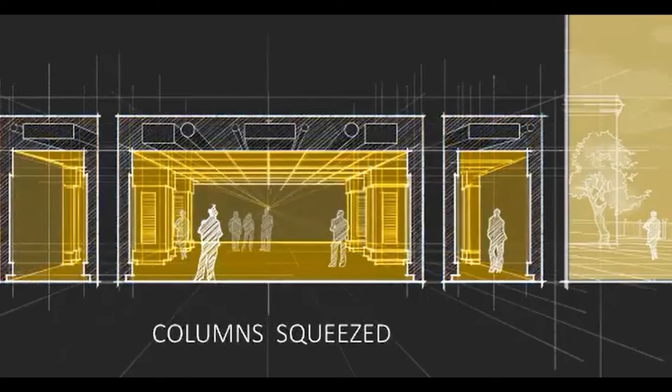I assume you've studied a bit about what architecture discipline is and what the studio does before attending this talk. But I will run you through briefly the foundation of the studio and our current works, and then move on to focusing on hospitality works as such.

I'm going to correct my introduction a bit. I believe while the term multidisciplinary studio is used a lot these days, design studios, architectural design studios, were always multidisciplinary. Even if you look at Corbusier's studio, you design multiple things - you go from cities to buildings to products to furniture and such, because if you had a point of view, you'd have a point of view on almost everything. Such studios never specialized in any one thing.

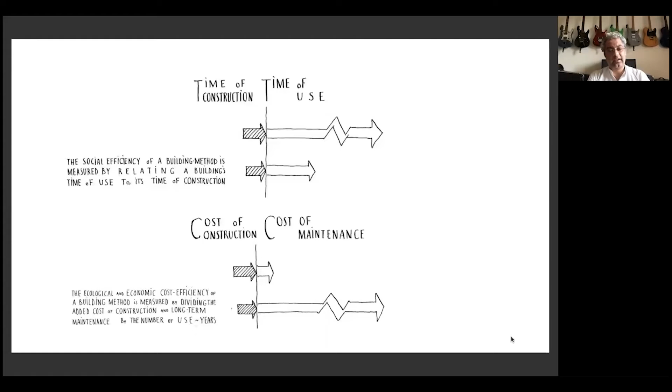If your project just sticks out like a sore thumb over 20, 30 years, it's not going to contribute to place. So the trick, while you do have to make a building which is a hoarding for itself, is often to source local, reduce manufacture, reduce transportation, and use materials with a high life cycle. If you work with the age-old formula of reduced construction time and prolonged use time, reduced cost of construction, and reduced cost of maintenance over time, you will have a physically successful project.

But that does not mean you don't search for contemporary forms of expression. A very good analogy for that is the Sagrada Familia - if you've studied it by Antonio Gaudi, what it was and what it has become in its new form, that's a good example. Another reference is the Tjibaou Cultural Center from Renzo Piano's building workshop in New Caledonia. If you haven't studied it, you should look it up - it's a great building.

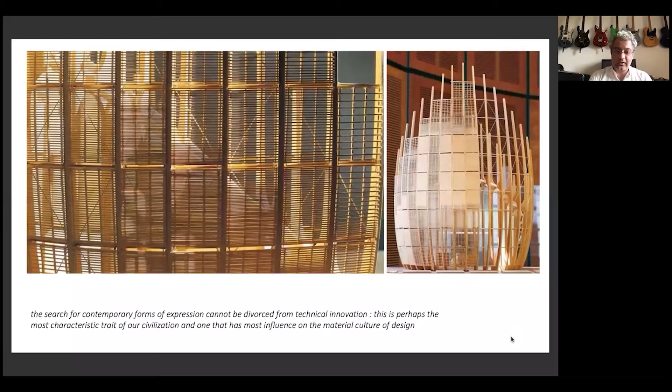Our first project was in 2003. This was not an architecture discipline project, but it was one of my first projects in hospitality - a small restaurant called Made in India at the Radisson.

Someone's mic is on.

This was the first time LED lights were used, way back - we'd got a local manufacturer to develop LED lighting for us. It wasn't even prevalent in the West when we did this, because it allowed color change, intense coloring, and fairly long-life light fixtures, and we had various references.

We realized through that it's important that you don't always interpret a client's values in the literal sense. That's what I mean about critical intimacy - while you learn and listen very closely to when a client is speaking, you must also be able to filter through it and contribute in a manner that is effective for the outcome of their project or business.

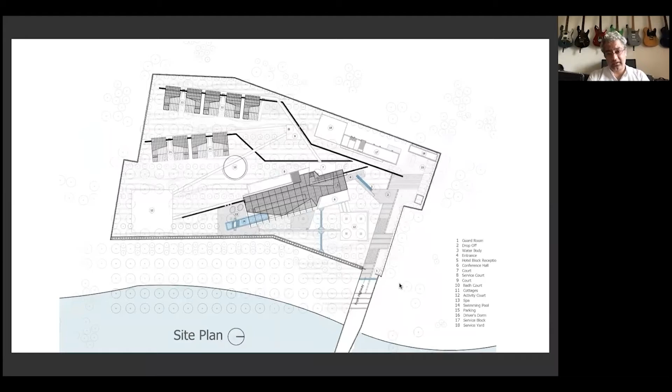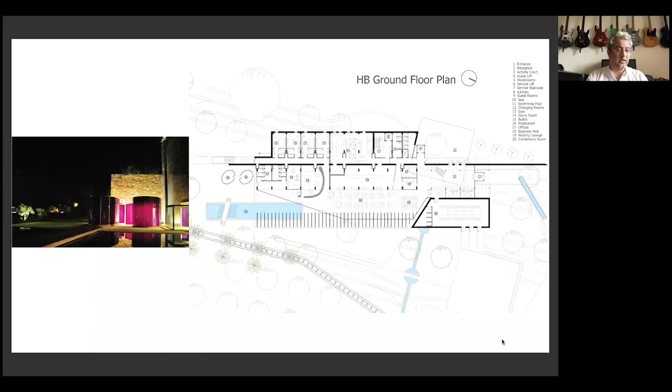This was the Ranakpur project. A lot has been written about it, but the project used a compositional grid, broke the compositional grid, and created a single large hotel building, but also a resort-like composition over about 7 acres of land, in a very programmatically complex space. So while people say hotels and hospitals are challenging because they're programmatically complex, we feel there's enough liberty, or enough space, in any building program to create unique architectural expressions.

What the Ranakpur project does is use passive and active energy responses, as well as an overall response to context and materials found at the site. So barring the steel and glass, all the stone you see was mined at the site, and a lot of what is called quarry rubbish - material that comes out with stone chips - has been used to actually create the building.

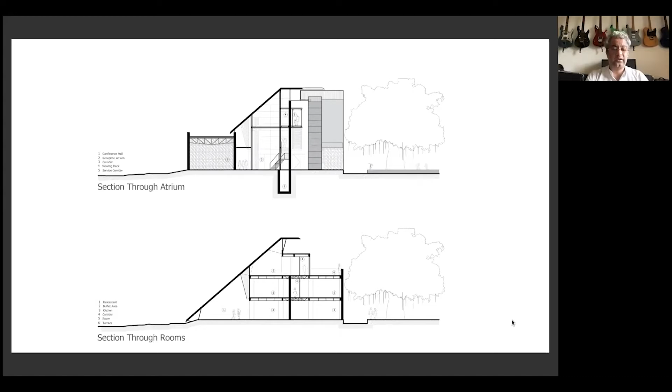A lot of traditional building techniques were used, such as minimal concrete, spanning using stone, supplementing the span using steel trusses, using clear served and servant areas, and basically juxtaposing the light with the heavy - the glass with the stone - is what the Ranakpur project became about.

Through an intense series of drawing exercises, using 13-14 meter tall spaces with large ventilated roofs but minimal steel sections, we were structurally using the building in a balancing act with a staircase that counterweighs what's going on inside.

Everything is a system that works together, as opposed to multiple independent things disconnected from each other and just slapped on. It became a more complex architectural system with buttresses to reduce the amount of material consumed.

Creating jalis, which I believe are now using perforated sheets. We created a lot of jalis which are now all over the place. I think they've been copied a lot, or used as a motif a lot, over the last 7 years. And using a ventilated roof to create an actively cooled ventilated roof.

What we learned from here, we also developed a whole new air conditioning system using thermal storage, a system called geothermal cooling, and displacement ventilation, all combined to create a very, very efficient 100% naturally ventilated building.

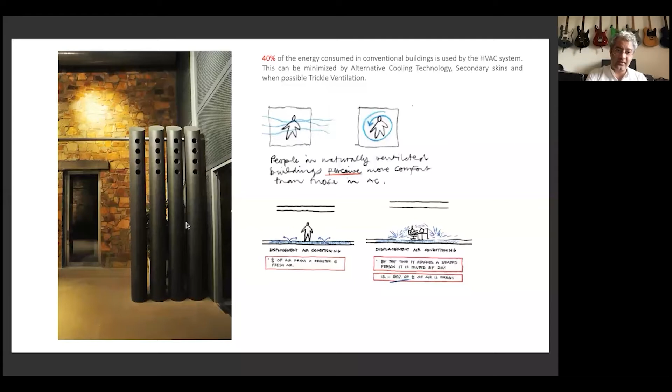So as you can see here, you see the glass, you see the block works, you see where the concrete elements are, you see the air conditioning elements, and you see the glazing elements.

And that logic continues with something called dissonance, where you break the space out with color, and that creates a certain form of expression.

The cottages are such that the site was overturned because it was fundamentally rubble, and this building had a floating foundation. Because the water table is just 1.5 feet from the ground surface, the building hardly has a foundation, even though these buildings are actually 9, 10, or 11 meters tall.

We didn't want to have the area flooded with lights, so we developed a lighting system so that everything bounces off these awnings. You get a sense of the moonlight when you're walking through. It's completely reflected — there's no glare.

At the same time, we as a studio - and that's something I should have said earlier - we don't pitch. Very often studios tend to go to clients and say, give us work. We never do that. We let people come to us, while we focus our energies on our own work. We don't focus on the business of architecture, our focus is on the fundamental principles of architecture itself. I think if architecture is considered a successful practice, once you do a few successful projects, people will gravitate towards those principles once they see the success of those principles.

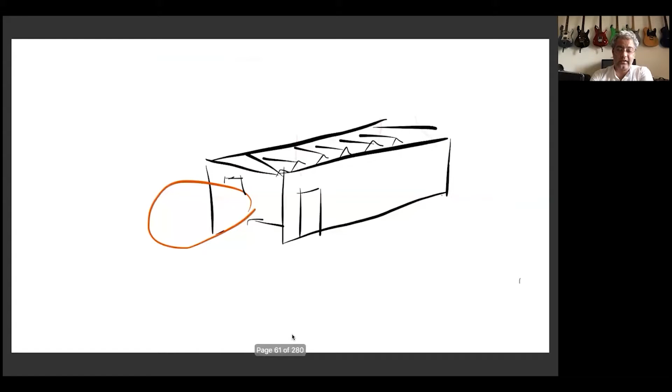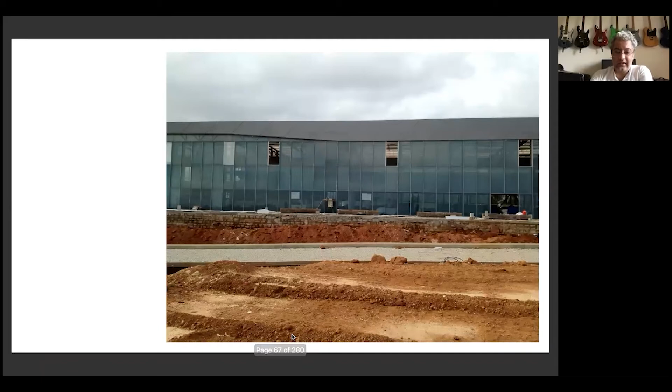So towards the end of the Ranakpur project, we were asked to do a town hall for a city. This is a very different project in its expression - an extremely contemporary building in Bangalore, because it was for the launch of a whole new city, a future city. So what would the future of urbanism be? And while that may remain the same, what is the future of architectural expression?

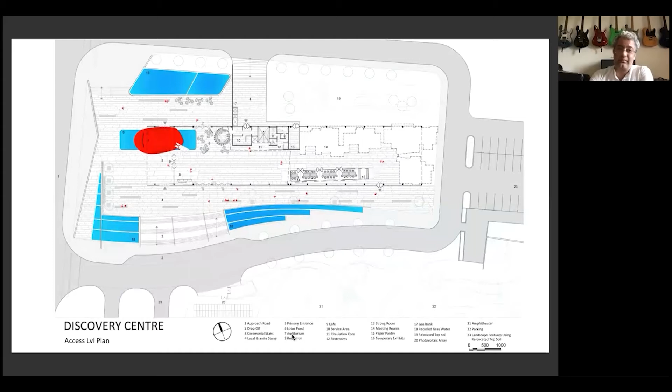This is a completely passively cooled building made of 3 layers of glass and steel. The span here is about 17 meters clear span. There's a suspended slab, with laced columns which are extremely thin. You can read about this building on our website, or on ArchDaily as well.

Actually, most of these projects use the same idea of perforated sheets, but use them to create a different visual interference pattern, called a moire. So while you move across the building, it seems to be moving in itself, because the lighting and shadow patterns are fairly dynamic - the building is constantly changing in its visual appearance.

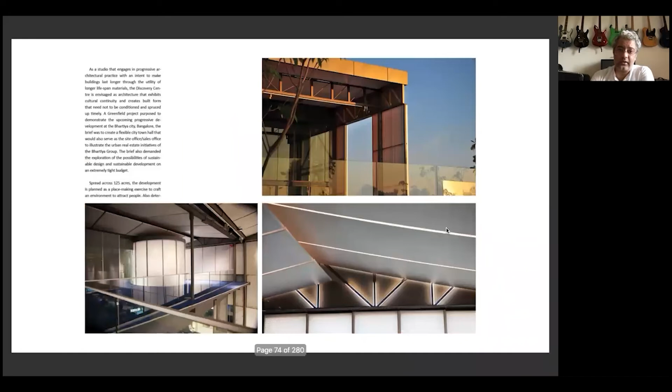Here again, the material has a long life cycle. We used aircraft grade paint, a lot of quarry rubble, and the building stays on a plinth with whatever's been mined all around the city. But the fundamental principles of architecture remain the same: using long lifespan material, using local material as much as possible, using recyclable materials, and creating an architectural expression that is contemporary and futuristic.

It engages you with some sense of curiosity, so the building becomes dynamic without relying on too much gimmickry. And you see here again, there is always a sense of jugglery with structure - these are 17-meter clear spans. The building is 105 meters long, yet you see the structure is very light but robust. You see how ceilings and elements float through.

I think this was also a project way back in 2012, so this is now almost a decade old. And again, displacement ventilation systems and such - this is natural light, this is not artificial light.

And the red egg is an auditorium. At that time, the entire building was powered by solar panels, with an energy storage system right here, with all recycled water, which was all rainwater runoff from the building itself.

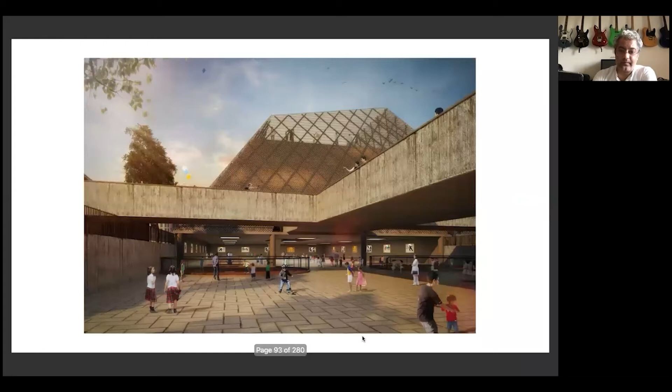This is a school - I'm going to skip that.

We also do public pop-ups and such, which are kiosks - I'm going to ignore that.

So every possible challenge - and I think more often than not, one of the challenges in architecture practice is that you are thrown a lot of constraints. You'll see people talk about limitations, constraints, how difficult it is to work with a particular kind of client, especially say the government.

What you have to overcome in your process is to turn all those limitations on their head to come out with something unique. For us, this was the first time we were working with the government, and we were thrown that challenge: 'we know you've never done this before, and we know this is hard for you. This is going to be very difficult, but it's also a big risk we are taking by giving a practice like yours this kind of work. But we've heard you are one of the best at this, and we need to put our best foot forward for the rest of the world.'

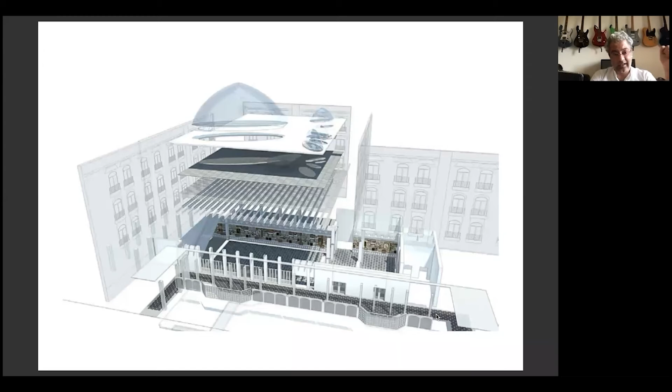What the project is, by the way, is an assembly - a construction assembly, where while the building is in Calcutta, the interior was entirely crafted out of factories near Delhi and shipped and assembled as a kit of parts. So everything that you see here was fabricated in Delhi as a kit of parts and has been pretty much knocked out, because it was impossible to do the physical build for the interior as well as the strengthening and retrofitting of the services and the existing structure at the site at the same time.

Remember, this is an operating hotel. It's one of the busiest hotels in Calcutta. So you can't really shut down, you can't really make too much noise.

Yet when you do an Oberoi-like project, which was one of our learnings in hospitality, there's really the only client we felt in India that had the vision to understand that design and architecture has to last a few generations before it should be refreshed or need change. And I really mean that. If you look at most houses that people live in, they are 3-generation houses before they're brought down. I think that's something we as architects have forgotten, and that's contributing to the kind of environmental disasters we are seeing. The building industry is a large contributor to it.

So for this particular project, we took references of the built history of the project. We scanned and 3D scanned multiple elements, rationalized them using computation, and they were then further rationalized into construction systems, into scale and rhythm, into polyrhythms, where you go from one layer to another layer to another layer.

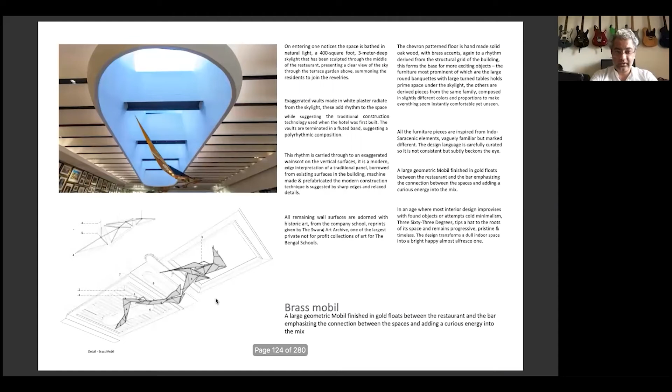Everything you see here was made in India, including the light fixtures and the mobile, all designed by the studio. Nothing was bought except the technical light fixtures and maybe the air conditioners.

And you always face challenges. So here's the bar at the other end. While we were breaking the bar and opening it out, we suddenly realized there's a 200-year-old column, a steel column, that supports 6 stories of the building above, which was never recorded in any of the as-built drawings. We had to come up with an intervention right then, and what we did was create a wine store and a media console so we could embrace that within the architectural expression of the space.

Most recently, we've also just finished the renovation of the Oberoi Amarvilas, which is now a 20-year-old building. This was finished during the pandemic—a 5-month renovation for the entire hotel. It's the only project that actually overlooks the Taj Mahal directly, and it was showing its age.

So we were asked to start with the public area, where we've done a series of prefabricated cross vaults with a minimal intervention.

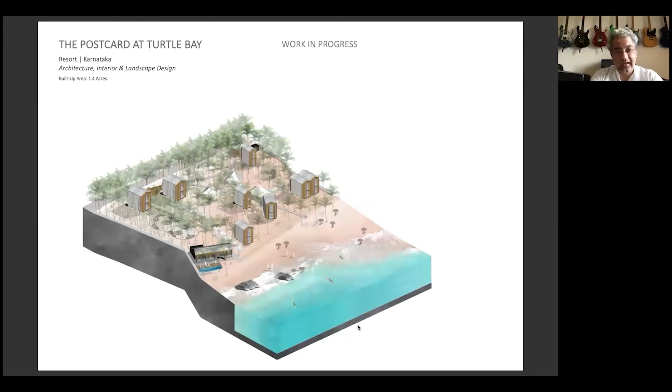From creating more bohemian spaces, to very high-tech construction on the seashore. This is the only hotel project on the high tide line, adjoining the sea in India, that has been built in the last 25 years. It's a resort near Mangalore.

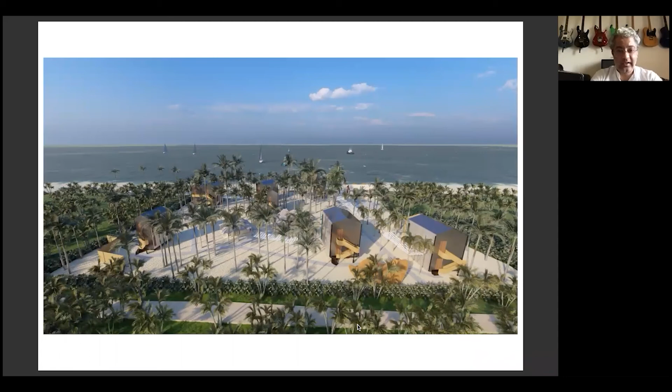It's built entirely of steel, prefabricated, but also layered with coconut rattan, a material prevalent in that region. The building comes together and is put up on site with minimal intervention. Within 2 months, you have a 22-room operating hotel. These are renders, but the project is very near completion now.

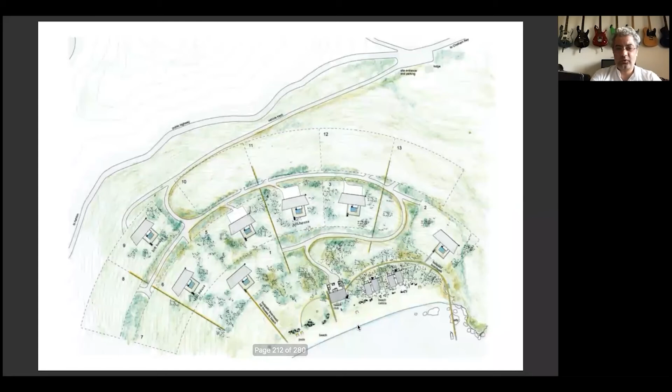If you've seen the Oyo townhouses, we actually came up with them, and the first 3 were done abroad. The idea was to actually clean up our city through subterfuge, taking a brownfield project to create a brand out of something that had nothing to do with the brand.

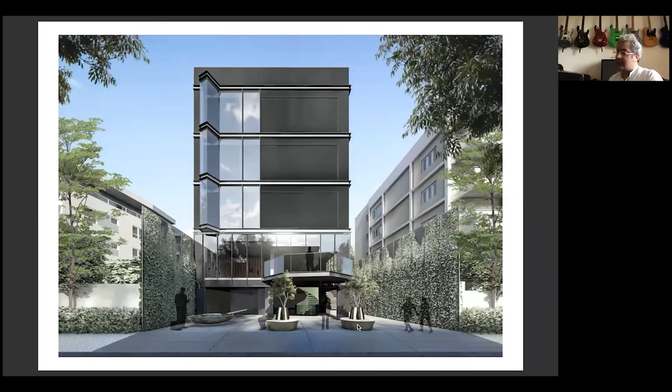That's not something that's happening in Postcard though. I think in Postcard the product is actually becoming stronger.

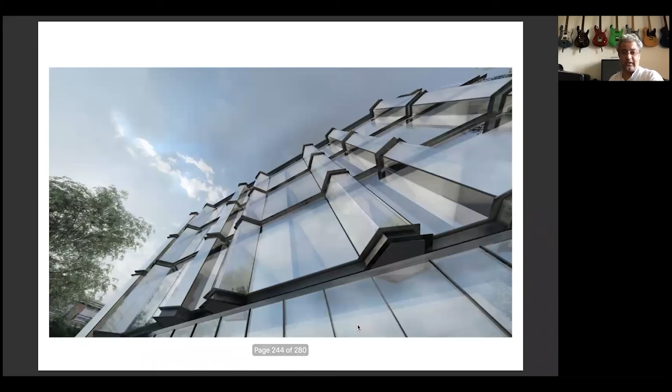These are a few other engagements of smaller hotels. This one is in New Delhi. It's a completely prefabricated building built over 1 year, around 30 rooms. All the rooms are made in a factory and sort of just plugged in, almost like containerized rooms.

And we're doing larger formats of those as well, where a container becomes a plug-in module for a room. Right, I'm going to stop here.